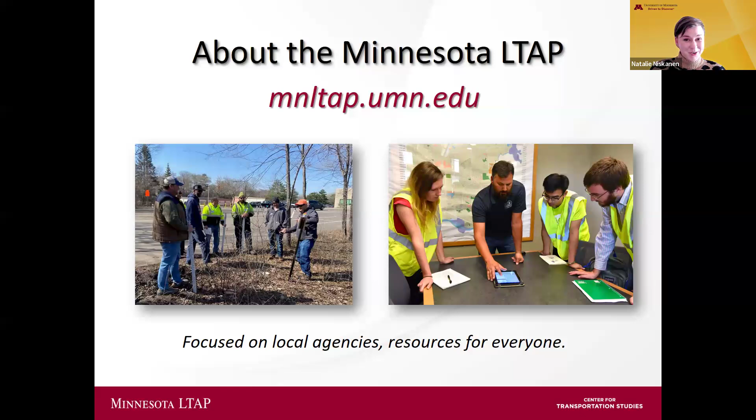I'm just going to provide a quick overview of the LTAP program before introducing today's presenters from the SSSBA. So the Minnesota LTAP is housed in the Center for Transportation Studies at the University of Minnesota. It's one of 58 centers nationwide, and our program is designed to provide local transportation agencies with the tools to improve operations through training, events, demonstrations, technical assistance, and technology transfer. And while we focus efforts on supporting local agencies, everyone is welcome to utilize our resources, whether you work for a consultant or contractor or work for a local agency in a different state or even a different country.

Minnesota LTAP provides multiple training opportunities throughout the year at convenient locations around the state, and we also invite locals from neighboring states to participate if it's convenient and relevant to them. And we also offer self-paced and instructor-led online courses, and everyone is welcome to check out our online training calendar to see what's new and upcoming.

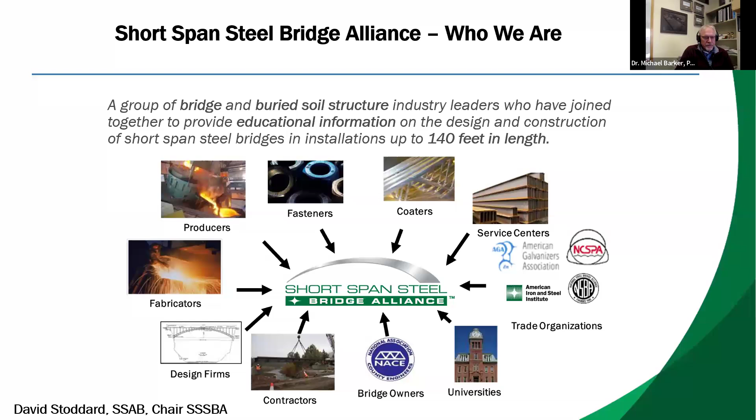Why we are. We started in 2007 with a couple major objectives. One was to remove design obstacles for short span steel bridges, and we're going to talk about those today. Overcome the preconception that concrete is always less expensive in the short span. We're going to talk about that today. Prefabricated steel bridge systems and accelerated bridge construction. We're going to look at some case studies. And then our innovative steel bridge systems that have been developed through the SSSBA or other mechanisms, and we will talk about that today. And of course, today is an example of it, but we are out there to educate owners and engineers and students in steel bridge design.

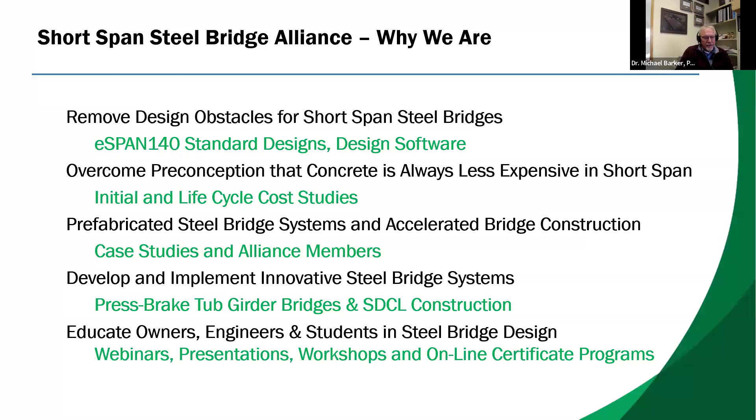So as the director of education, I kind of categorize my education programming as the 5 C's: cost, convenience, construction, county built, and carbon. Now, the ones that are circled here in red, we're going to talk about with some examples and that kind of thing.

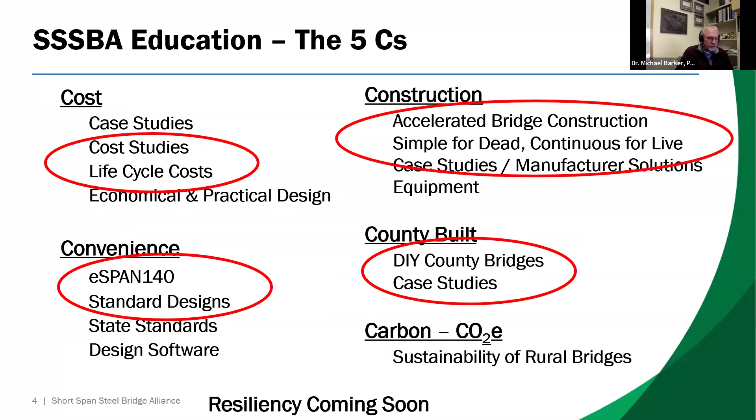And coming soon is resiliency, but I don't have that in the 5 Cs because I can't figure out yet how to do an R with 5 Cs, but that's coming soon. So what we're going to talk about today is initial costs of steel and concrete bridges, or dealing with that preconception, life cycle costs, because responsible owners should consider life cycle costs and long-term performance,

a design tool, eSPAN140, which will give you a steel bridge design in a matter of just a couple minutes. And then, of course, Bridge Manufacturer Solutions, where our Alliance members will design a bridge, sign a bridge, build it, and deliver it to you. Then we've done quite a bit of work with local crews building county bridges, so we're going to talk about that a little bit. And then an innovative system, simple for dead, continuous for live, steel bridge construction, which is an innovative design.

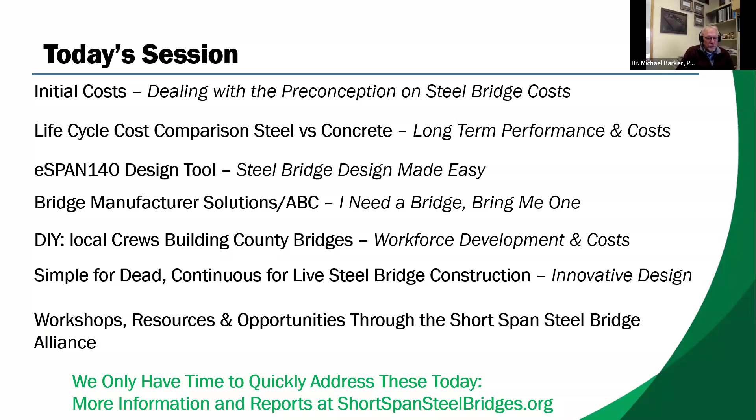Then we're going to end up talking about how you can find out more information, or what our resources are, or additional training. And we only have time to quickly address all these topics today. So Natalie is going to send out that survey to let us know what you're more interested in and how we can get you some more information. But a good place to visit for all of the information is always shortspansteelbridges.org, our website.

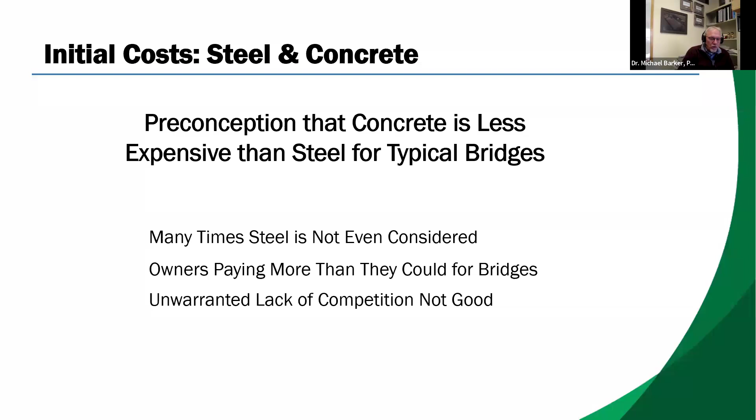So let's start. Initial cost, steel versus concrete. When we started this back in the late 2000s, there was across the country a preconception that concrete is less expensive than steel for typical simple span bridges. To the point where in many states or many counties, many times steel was not even considered. They just went directly to a concrete bridge. And what the National Steel Bridge Alliance found is that the owners are paying more for those concrete bridges when there's no competition than if there is competition. And that unwarranted lack of competition is not good for anybody, the public or the owner.

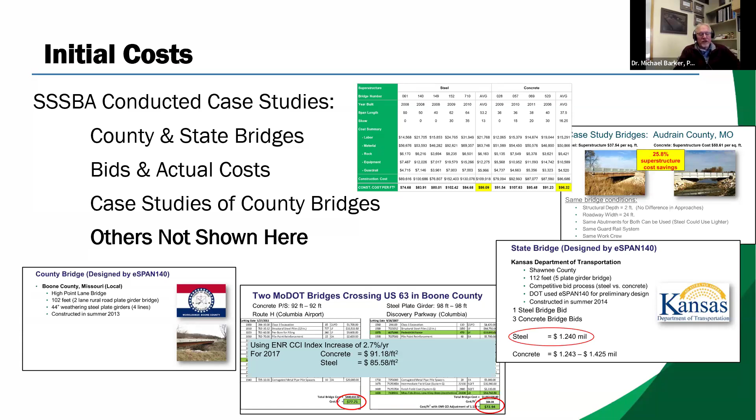And so the Alliance has done I can't tell you how many studies on first costs, and I'm not going to go through them individually just because of time, but I will show you where we're going to be giving this presentation in February a little bit later in today's talk. We've conducted case studies where we look at county bridges and state bridges, and we look at actual costs and bids and that type of thing. And this is just a smattering of some of the case studies we've done to show that, yes,

that preconception that concrete is always less expensive than steel bridges is a misconception, that steel and concrete bridges are competitive. So I'm not sitting here saying steel is going to beat concrete. What I'm saying is, we should consider both steel and concrete so that we get the best product for the best price. And you can look at all these studies on that website, shortspansteelbridges.org.

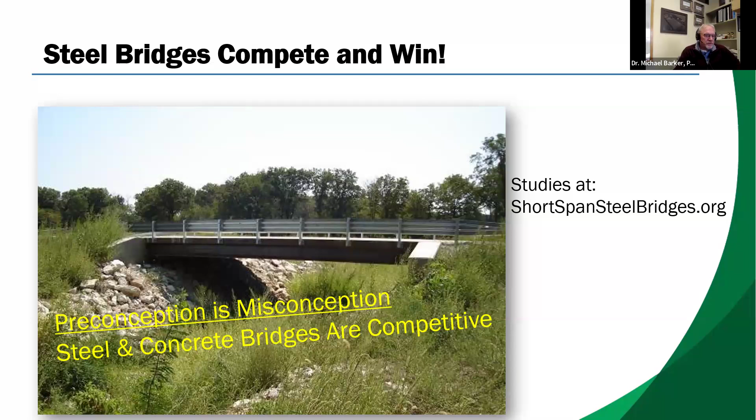But what about life cycle costs? Like I said earlier, responsible owners are starting to look at life cycle costs and life cycle performance of bridges. And as owners replace those bridges, the question of service life and life cycle costs comes up. It's one of the most common questions I get when I go out and talk to counties and states. And the bridge industry, it says, does not have a good answer. And I crossed that out and said, did not have a good answer.

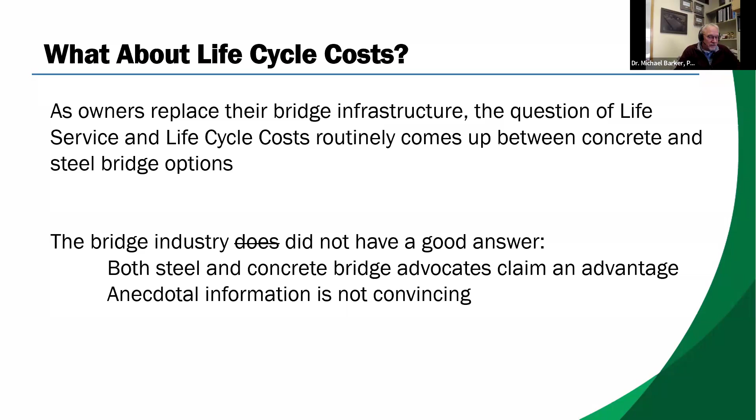In fact, the concrete people always said, oh, no, concrete bridges have better life cycle costs. And the steel bridge people always said steel bridges have better life cycle costs. And they would give their information, and that anecdotal information was not very convincing. And so the Alliance did a study back in 2015, I believe, where we looked at the historical service life, or the performance and maintenance, and the life cycle costs, or the true agency costs, of steel and concrete bridges in Pennsylvania.

And we looked at a very large database, like 1,700 bridges. And it looked at the historical service life because that's what actually happened. The initial year for the study was 1960, when precast concrete became very popular and quality steel detailing became popular. So it looked at more or less modern bridges.

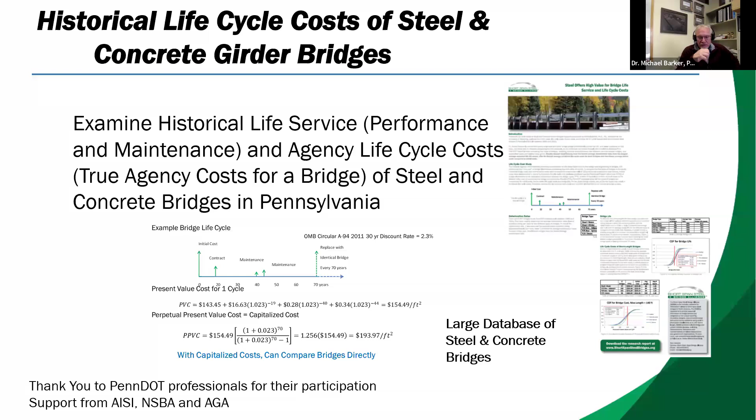And the conclusions from all this. Now, this is a big study, and again, I'll show you where we're going to be giving this here in February. Typical concrete and steel bridges, we're talking about the boxes and the I-girders and the rolled beams and the plate girder type bridges, are competitive on initial costs, which we already knew, future costs and life cycle costs, and even bridge life.

And the conclusion of this study is that owners should consider both steel and concrete bridge alternatives for individual bridge projects. When we looked at all of that data, all the types of bridges are similar with none way out of balance, meaning none have high life cycle costs compared to the others or low. And you can find this report on the shortspansteelbridges.org website.

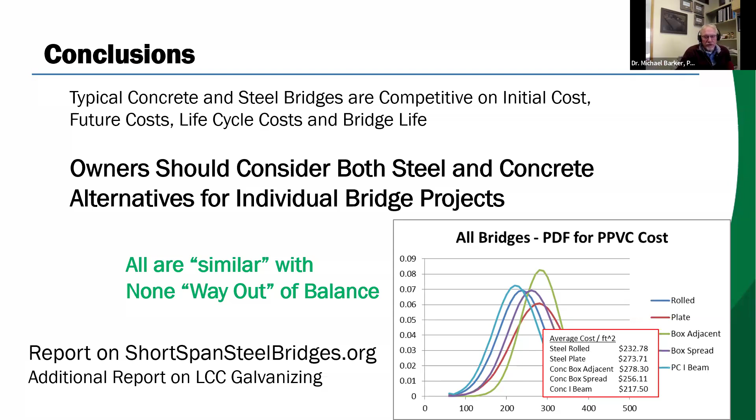And then we also did a study on galvanizing. Galvanizing is a long-term steel protection system. And so the industry was interested in what kind of effects galvanizing has on life cycle costs. You can find that report there also. Okay, so we've taken care of costs.

So the Alliance deals with these types of bridges, where yes, corrugated steel pipe, or what we call culverts, is a buried steel bridge, and that's certainly one that our group associates with. And then you've got corrugated steel plate, which is kind of an arch bridge, with corrugated arches going across there to create the bridge. And then, of course, the rolled beam shaped bridges and the plate girder bridges.

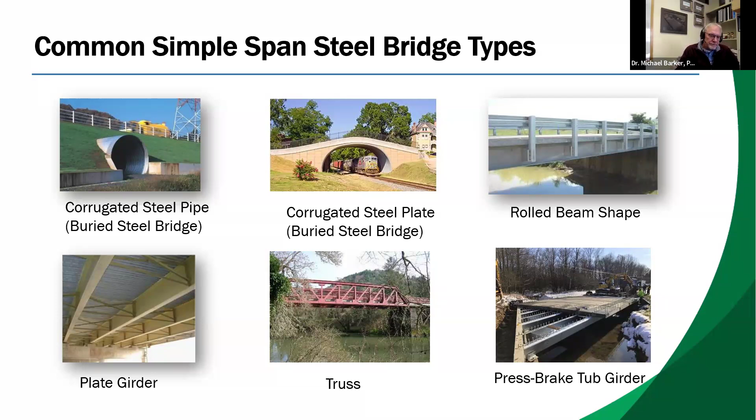And then our manufacturers certainly have their truss bridges. And then as part of the Alliance and industry, we developed the press brake tub girder. And we're going to look at an example of that because that's one you might not have heard of before. But if we think about the bread and butter bridges, the traditional fabricated steel bridge where a county or a state wants to put in this 80-foot bridge.

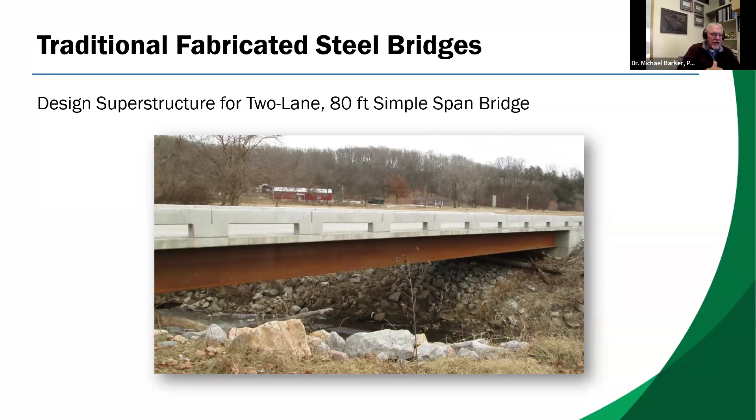Well, in the beginning, that owner or the engineer has to make some decisions on the service performance of that bridge. For the hydraulic opening and all that, we need this 80-foot simple span composite bridge where we're going to build it out of steel girders. We're going to have two 12-foot travel lanes with an average daily traffic, a certain width, and we're going to use Jersey barriers because we want to protect the water underneath maybe. Okay, that's the service part of the bridge. That's what you see when you're driving over it.

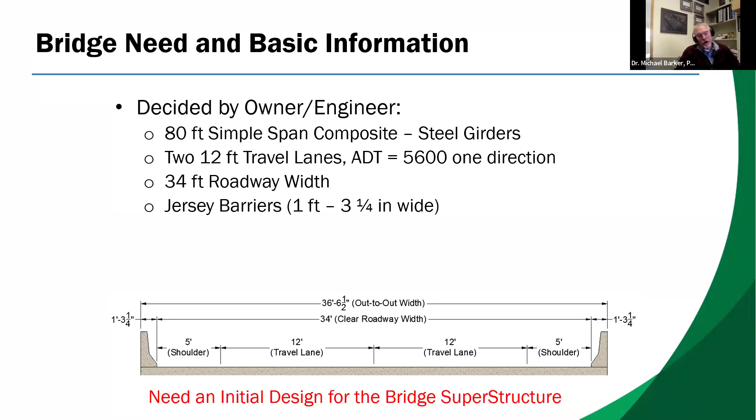Now, we need an initial design for the bridge superstructure. What kind of girders are we going to put underneath that meets all of the AASHTO requirements and is economical and performs well? Well, the Alliance developed eSpan140, which is a free design tool that you can find on shortspansteelbridges.org, where it has created a very large database of different designs that meet all the AASHTO criteria for span lengths from 20 to 140 foot, for different girder spacings.

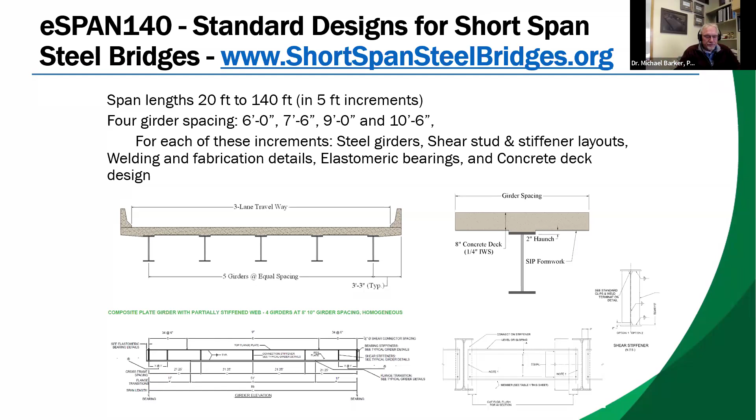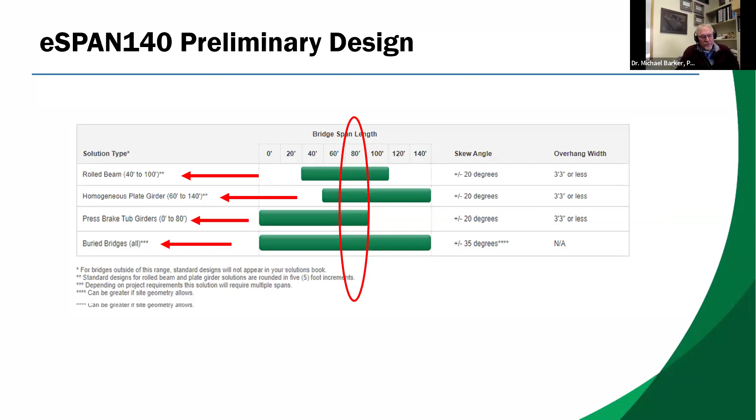And for each one of those, eSpan will give you the steel girder design, the shear stud design, stiffener layouts, welding, fabrication details, even the bearings and the concrete deck design. And so if we need to design this 80-foot span bridge, we go into eSpan, and it's going to give us 4 or 5 solutions. Yes, it's going to give us a rolled beam solution and a plate girder solution, but also some of our manufacturers' solutions like the press brake tub girder or buried bridges that we'll look at a little bit later. But for an 80-foot span, it's going to give us a rolled beam and a plate girder. It's really simple to run.

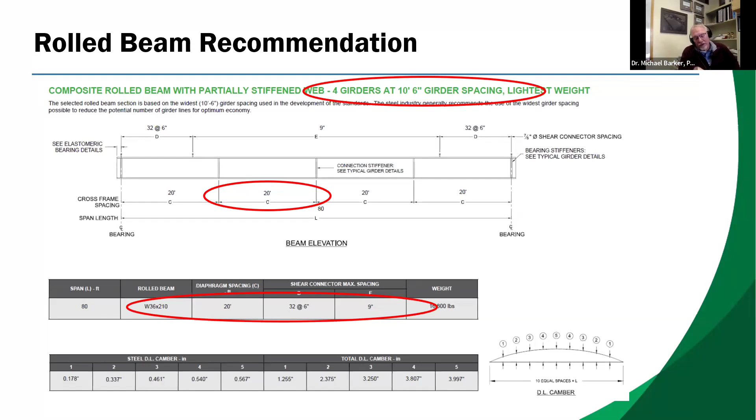You put in how long the bridge is, how many lanes you have, what your roadway width is and what your barriers are. And it's going to give you some designs that meet all the AASHTO requirements. This is an example of the lightest weight rolled shape design. It also does limited depth rolled shapes. And it says, let's put those girders at 10 foot 6 inches, let's make those W36 by 210s, and let's have some diaphragms every 20 feet. Boom, in a matter of minutes, you know what it's going to take. For the plate girder, we can optimize a little bit better. We can get rid of some of the weight by transitioning the flanges and making the web thinner.

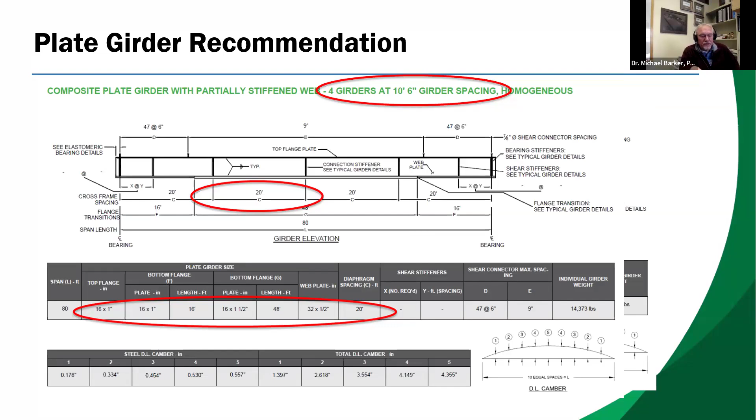Here's a plate girder, a homogeneous plate girder made out of 50 KSI where it says, yeah, we're going to have a top plate and a bottom plate. We're going to transition that bottom plate. We're going to have a web, and we're going to have those diaphragm spacings at 20 feet. And now, in just a matter of minutes, we have a design that we can put on the table and compare to those concrete options and then let the market decide.

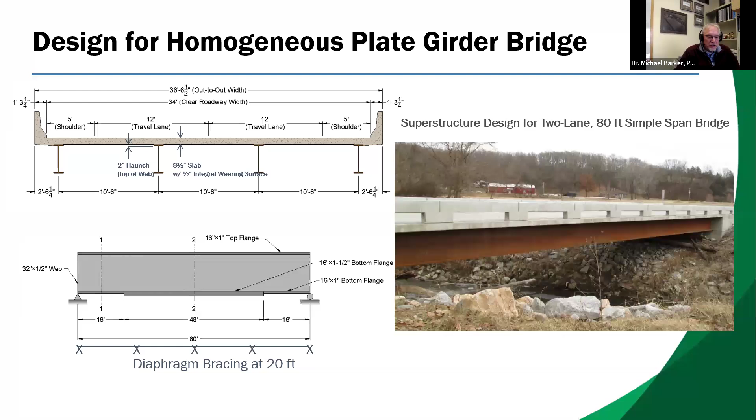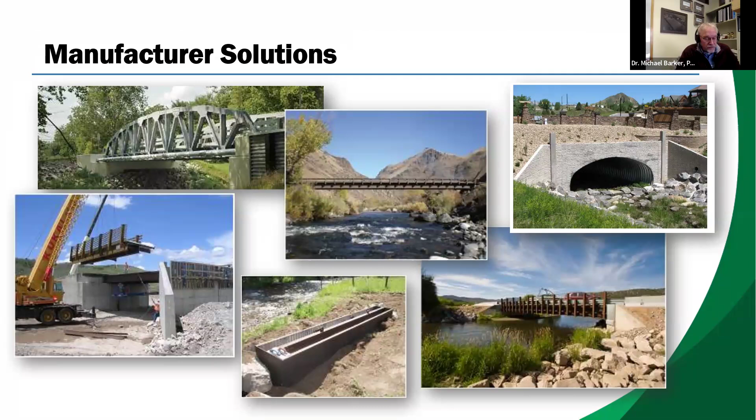Now we have a superstructure designed for that 2-lane, 80-foot simple span bridge in just a matter of a couple minutes. Now, I did say that eSpan will also talk about manufacturer solutions. We have prefabricated bridge manufacturers that are part of the alliance that do truss bridges and modular bridges and ABC abutments and the whole range of things, whether they're buried or rolled or plate or truss.

We're going to look at three of those, three different types of bridges. So these are prefabricated, which kind of means they can be accelerated bridge construction bridges. And we're just going to look at a showcase of three different types of steel bridges. The first one is a buried steel bridge, one of those arch bridges from Big R. A modular beam bridge, the most common type of prefabricated bridge, from Contech. And then one of those press brake tub girder bridges that you might not have seen before from Valmont.

And these prefabricated bridge manufacturing firms and traditional fabricators fabricate and deliver many styles of steel bridges. And these case studies are just a sample of the varieties that they produce. And of course, you can get more information just from an internet search, but also from our website, shortspansteelbridges.org.

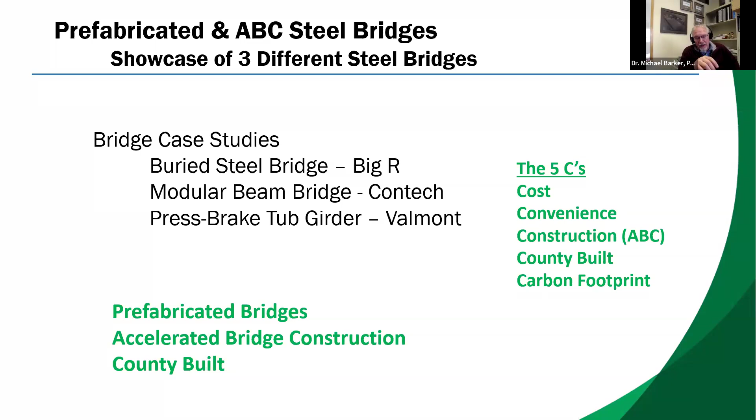So for this first case study, this corrugated steel plate buried steel bridge was built in St. Johnsbury, Vermont. The bridge was fabricated and designed by Big R Bridge in Greeley, Colorado, and built by J.P. Sicard. The bridge is located on a steep, narrow site on a curve with residents living right nearby. And there's poor soils on the site, so the designer needed a system that could accommodate significant differential settlement.

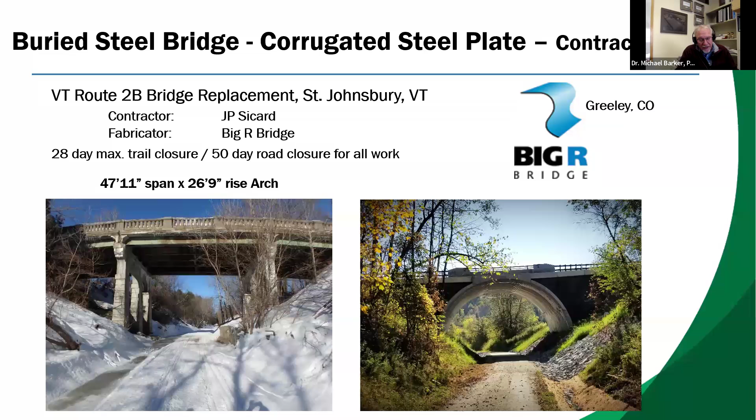Now, limiting the days the trail could be closed, so this is a rails to trails type project, and constructing the bridge before the peak summer and fall seasons was a priority of the owner, and the contractor had a maximum 50-day closure of the roadway. But they actually earned a monetary incentive when it was reopened after only 45 days. And so this ABC project used precast concrete foundation blocks and precast wall panels to significantly shorten the construction time with no concrete curing times.

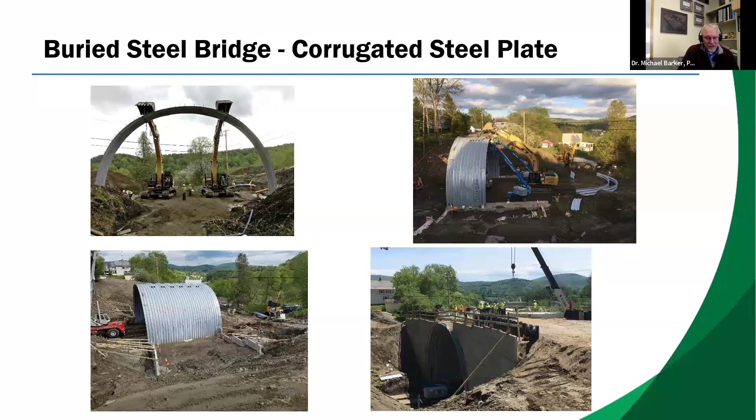And so the corrugated structural plate is stacked and shipped to the site and bolted together to make the arches. And then light equipment can be used to lift the arches and connect them together across a width for stabilization. And then the bridge arch is covered with soil and the roadway built. A buried steel bridge is lighter weight, flexible, and able to handle anticipated settlement. With the lightweight structure, the Vermont bridge was able to use those precast footings.

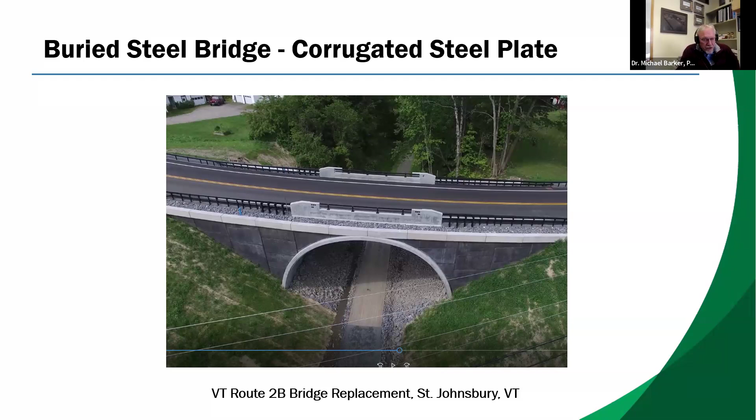Because of the arch, shorter spans are required to achieve vertical clearance requirements, and there is a continuous road surface with no bridge deck or joints to maintain. So that was our first example, a buried steel arch bridge. They also come in lots of different forms. For instance, that was kind of a significantly large bridge.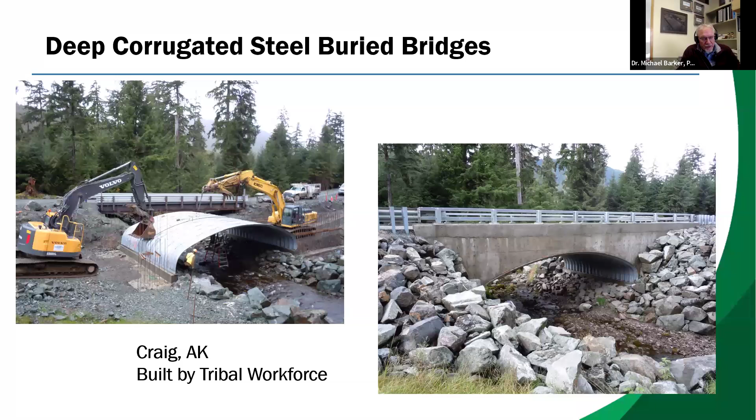So the prefabricated modular beam is probably the most common prefabricated bridge out there. This one is a county crew built bridge. It was built in Whitman County, Washington, and it was a replacement project built by county forces for an originally built 1952 wood structure. The replacement bridge was planned to have a longer span in order to improve the hydraulic opening under the bridge, which is very common. And this also made it easier to build the new foundations behind the existing wood foundations.

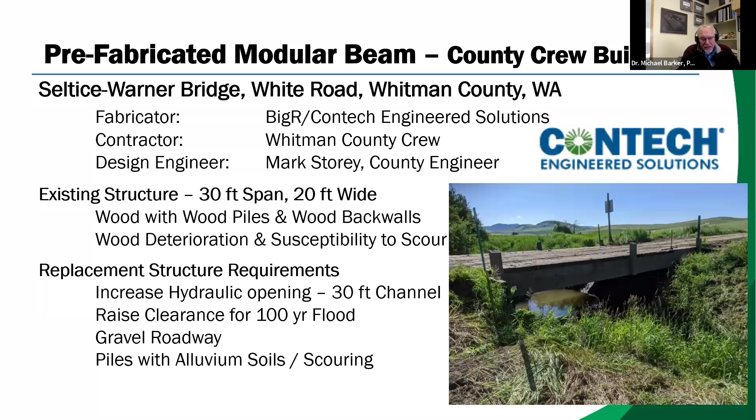And one of the goals of the replacement bridge, of course, was to open the channel wider and raise the bottom chord of the bridge above the 100-year recurrence flood. And then this is again a gravel surface bridge. Now the successful bidder with the lowest cost was a modular rolled beam steel structure supplied by Contech.

So the final dimensions for the new superstructure were 35 feet long and 28 feet wide. The modular rolled beam steel bridge consisted of 3 modules that were shipped out to the site on 1 truck. And each module had 2 weathering steel rolled beam girders fully assembled with a corrugated steel deck for the gravel riding surface.

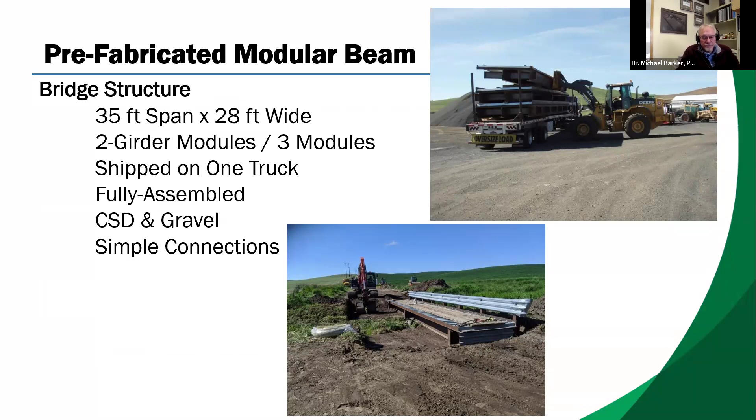Now, these are just a few of the pictures of the 2-girder superstructure modules being erected. The modules are shipped to the site, assembled with corrugated steel decks, side dams, simple cross-frame diaphragms, and guardrail stubs. Front end loaders and excavators pick up the modules and place them on the abutments with the bearing assemblies. The modules are connected together using simple connection details. The guardrail stubs, guardrails, and back wall are installed, and the gravel roadway surface installed.

And so here's where selecting a bridge structure that can easily be handled by 1 or 2 excavators significantly reduces the overall project costs and shortens the construction time. Modular steel bridges in particular fit this product category as they are relatively lightweight, are easy to handle, and match and fit well due to the quality of shop fabrication. And with no concrete curing time, the bridge is ready for traffic.

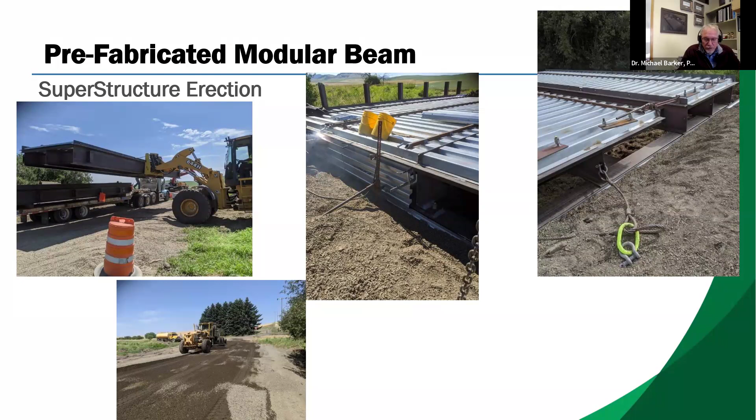Now, this Seltice-Warner Bridge project was started on June 15th and completed and opened to traffic on July 15th in 2020. Whitman County sought competitive quotes for the manufacture and delivery of both steel and concrete superstructures for this site. The cost for the concrete alternative was $82,000 and the cost for the modular beam was $59,000. And so I just put this in here to show one example where, yes, steel is competitive and steel should be considered. And then, of course, with the cost of labor and equipment, the pile foundation and permitting, the total bridge cost was $159,000 or $162 per square foot.

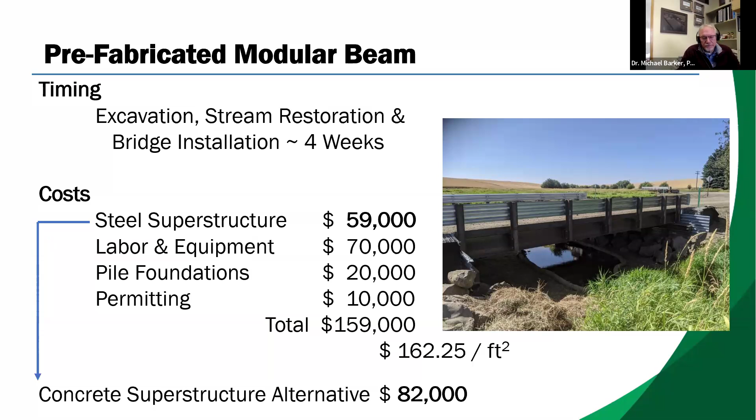County crew built bridge. Now you have a company right there in Minneapolis, Minnesota. Now we thank everybody for joining us. And we started with Minnesota LTAP, but because of the word of mouth and the marketing, wow, we have people from all across the country.

But I do want to mention that in Minnesota, you have one of these prefabricated bridge manufacturers right there in Minneapolis, Wheeler. And here's just a couple examples of bridges that they have produced in the past. Out in Utah, they had to replace a bridge that serviced a lot of agricultural area, and they came in with a modular beam bridge with a concrete deck.

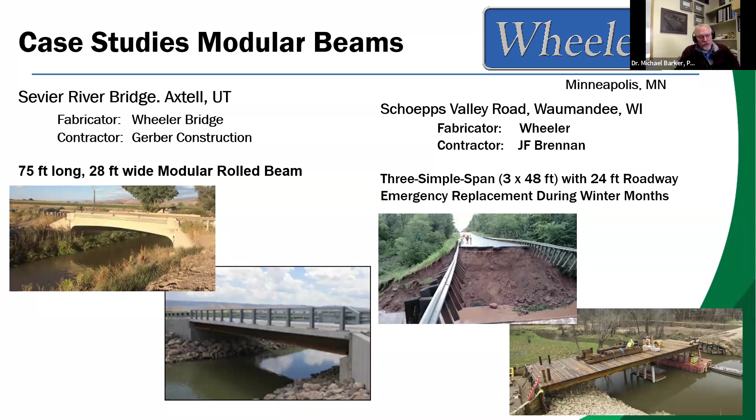And then the one on the right, in Wisconsin, there was a storm that took out a bridge, and we're talking about in the winter months. And they needed that bridge because it cut off part of a community. And Wheeler was able to come in there with a no-concrete steel and wood bridge and replace it during the winter months with accelerated bridge construction. And of course, you can contact Wheeler or any of these other manufacturers through the website or through your own internet searches.

So we've got one more we want to talk about here. This is a press brake formed steel tub girder. So FHWA came to the Alliance back in about 2012 and said, hey, what is the next modular accelerated construction steel bridge product that we should be pursuing? And we got a lot of people together in Chicago, went to a Cubs game and also met, and came up with a press brake formed steel tub girder, where you take a standard width plate, put it in a brake and bend it into a tub, put some shear studs on it, put some concrete on it. So you have these modules, and then you go out and you just put them in place.

So that reduced fabrication costs, because yes, tub girders have been around a long time, but you take a flange and a web and you weld them together. There's no welding here, which removes fatigue issues, which reduces costs, and they can be mass produced. And it reduces stiffeners and cross frames. And these can be accelerated bridges. In fact, with a precast deck, you can install these bridges in 1 or 2 days. They are modular, they're simple to fabricate and install. Now, our research on that started in about 2012, but there's a guy in Michigan that actually put one of these in place in 2004.

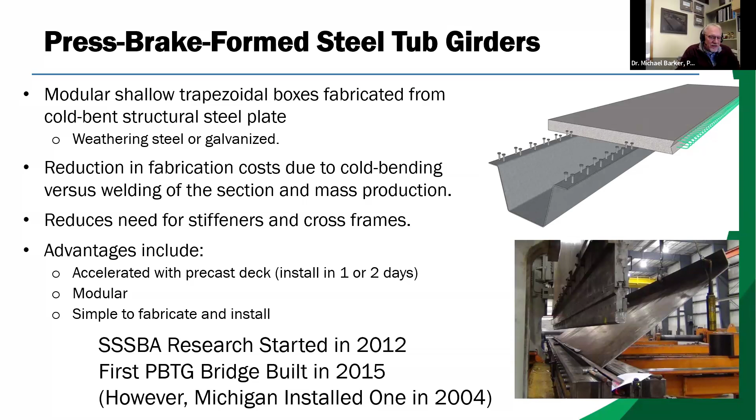Now, that same guy who built that 2004, he went to a company called Valmont and said, hey, how about we develop a division here to produce these press brake tub girders? They call them U-beams, but it's still a press brake tub girder. And this is not a proprietary design, but Valmont decided to take this and run with it. And they've done a really good job, as I'll show you on the next slide.

And so the bridge I'm going to show you is here from Barron County, Wisconsin, where there was an existing timber slab structure, 96 foot long. It was old and they needed a new structure. And Barron County went with a two-span, 104-foot length. So, of course, they increased the hydraulic opening a little bit and clearance a little bit. And they used these press brake tub girder bridges.

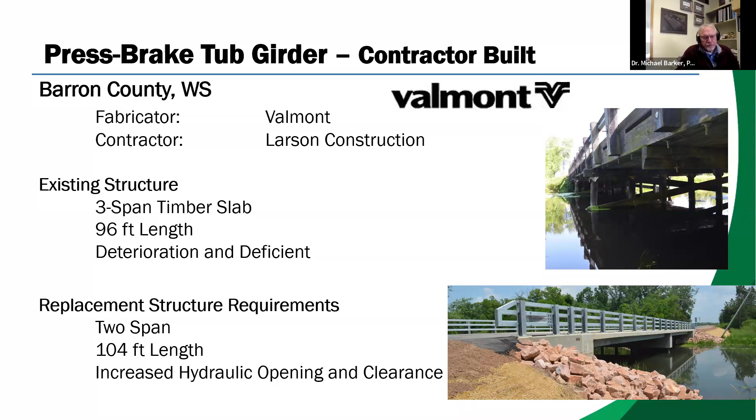And so at Valmont, they developed this whole system where they bring in these standard width plates. They came up with efficient ways of bending them. Then they have a machine they developed for cambering them. Again, another machine to put on those studs. And then, of course, Valmont likes galvanizing, which is really a good steel protection system. And they have all that stuff right there because they're poles.

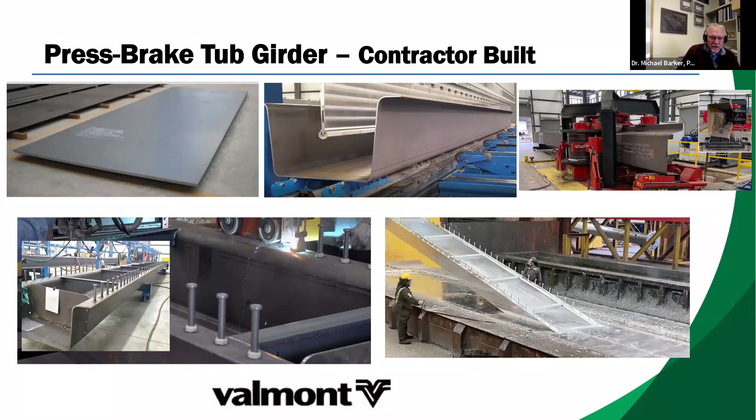They build these tubs. For this bridge, they built the tubs without a concrete deck, shipped them out there, put them in place, put on the concrete or shored up, put in the rebar cages, cast the deck, put on their guardrail, and they have this two-span bridge.

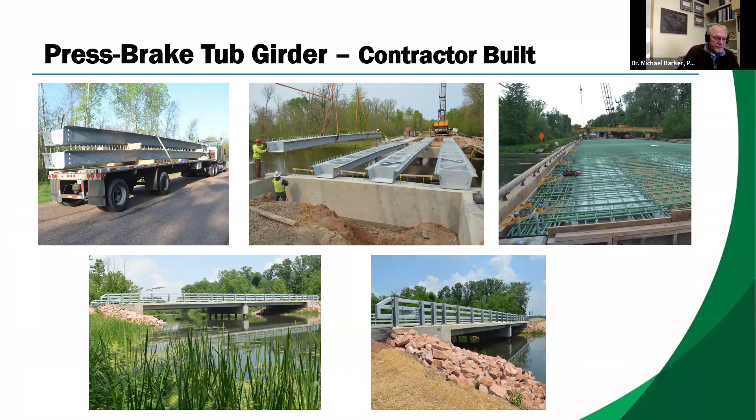Now, you also can precast these things. One is precast the decks right on those tubs, and Valmont will do this for you, or you can do it on your own with your own fabricator, where now you send out pre-decked modules and you put in a longitudinal closure pour with like a UHPC or something like that.

Or the bottom slide here shows where those tubs go out as individual tubs and they have the studs on them, and you put precast deck panels on them with grout holes and all that kind of stuff. And you do the closure pours in the grouted shear pockets. And so if you have questions about these, you can contact the Alliance or you can go to Valmont directly.

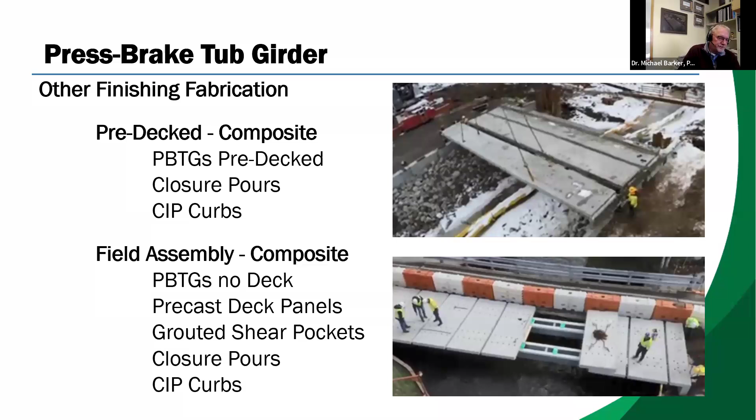Okay, so we looked at a couple bridges that were contractor built, and we looked at one bridge that was county built. And so the Alliance started putting together some educational resources for counties to consider whether they should be building their own bridges. Because there are a lot of bridges in the counties that need replacement. And we need cost-effective and sustainable solutions. And one option is to use county crews for bridge installations.

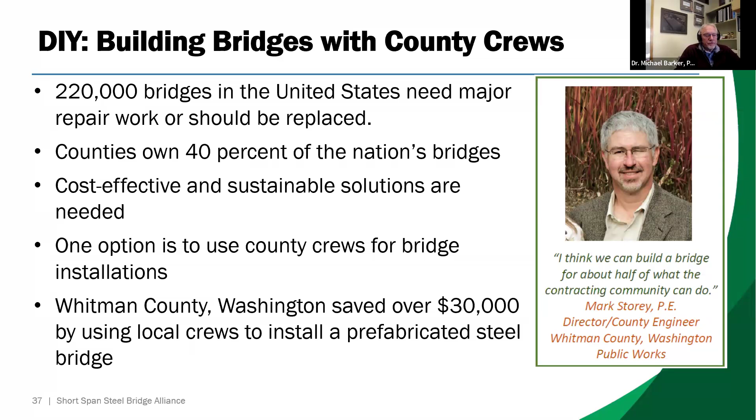For instance, this slide here says Mark Storey up in Whitman County saved over $30,000 by using local crews to install a prefabricated steel bridge. It also develops his workforce. So the Alliance developed a DIY county bridges education packet, where there are over 3,000 county type organizations in this country.

And the purpose of the packet is to have counties consider whether they should be building their own bridges, because counties can save money and of course build more bridges, which is very, very important for those counties. It can use accelerated construction and minimize public inconvenience because they are in control of the work site, and it develops county workforce and uses county equipment.

So we came up with 6 topics. There's kind of 6 lectures in this, which starts off with, can your county build this bridge, and then moves into planning, permits, environmental issues, geotech considerations, and then how to select a bridge type and bid for that and award that. And then foundations and substructure design and installation, because there are some easy ways that the county can do it, or you can subcontract that out and have a contractor build you one.

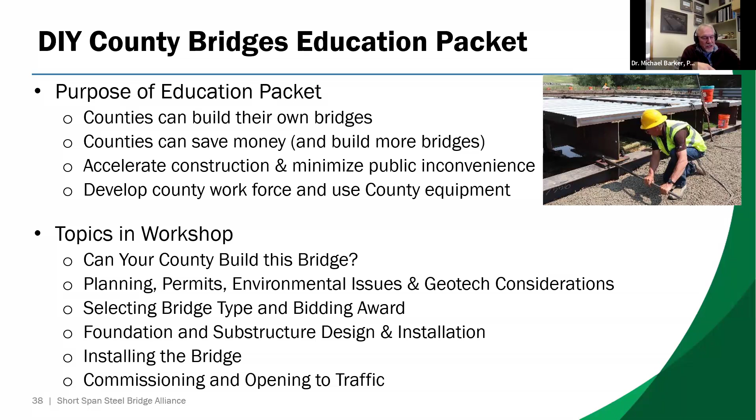And then, of course, installing the bridge. That's actually the easy part, especially if you buy one of these prefabricated bridges, and then commissioning and opening to traffic. And so we use this Belmont Bridge in Whitman County as a learn by example for how a county can build their own bridge.

And it starts off with the existing bridge being a pretty old, deteriorated wood bridge, only 20-foot long, and the new bridge being 30-foot long. So we increase that hydraulic opening, increase the clearance, 28-foot wide. And this is a TrueNorth modular steel bridge, installed by the county crew.

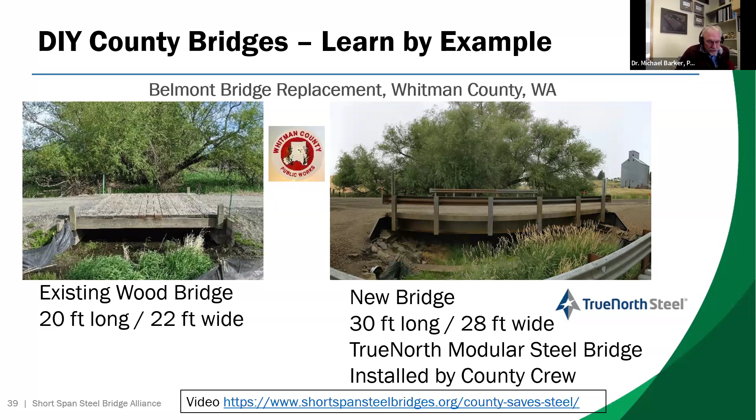Now at the bottom there, and I know that Natalie and Dan Snyder are going to post these on the websites later. Take a look at that video. It's pretty cool. That's just a video that talks to the bridge engineer and the bridge foreman and the workers on how they developed the capacity to be able to do their own bridges. So that's a good video. I'm not going to show it here, but you are certainly welcome to go through with that. And True North is one of our Alliance members.

Now, we gave this talk to NACE, the National Association of County Engineers, in 2022 with just a 1-hour presentation. They weren't sure what they were getting. And I, Michael Barker, and Mark Storey, that engineer from Whitman, went and just gave a 1-hour talk on this. And it was very well received. They were really happy with it. And so they invited us back for a 2-hour session the next year for NACE.

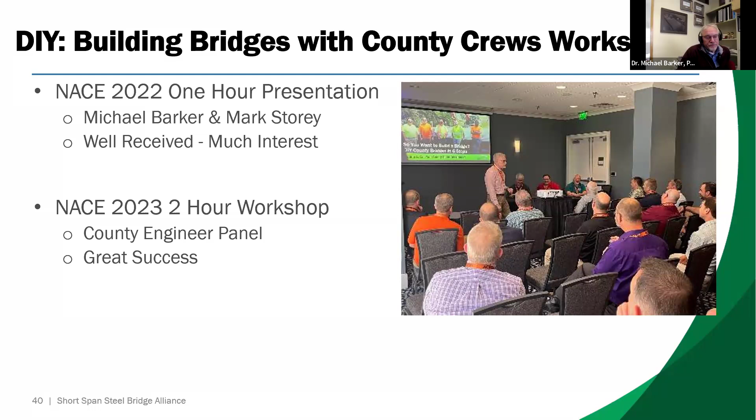So we know there's lots of bridges that need replaced. We know there's ways to do that. We know we have alternatives for materials and construction and all that kind of stuff. And one of the driving factors for getting this done is the new bridge infrastructure law, right? And in that, you can get good federal money for doing bridge projects on a local level or a state level with a state-local partnership. Now, the minimum amounts are pretty big.

And so even in the BIL, they talk about bridge bundling. Hey, let's get several bridge projects together that are coordinated in the design and construction to help economize, save money, and get these bridges built. And a lot of this money under the BIL and of course the BIP, the Bridge Investment Program, are targeted for tribes or local bridges or off-system bridges. And so there's money to go after, and bridge bundling becomes an important part of that.

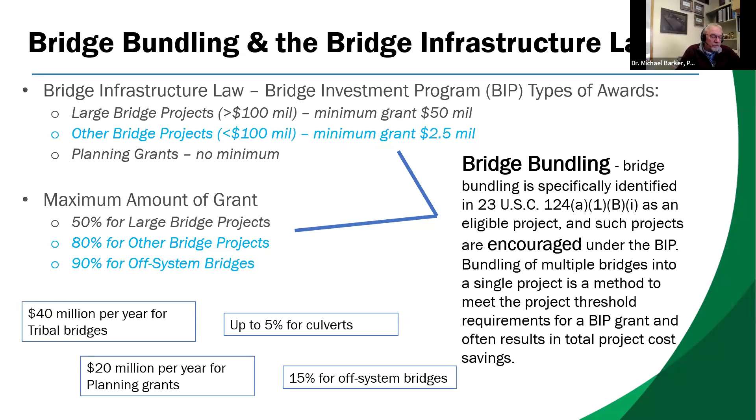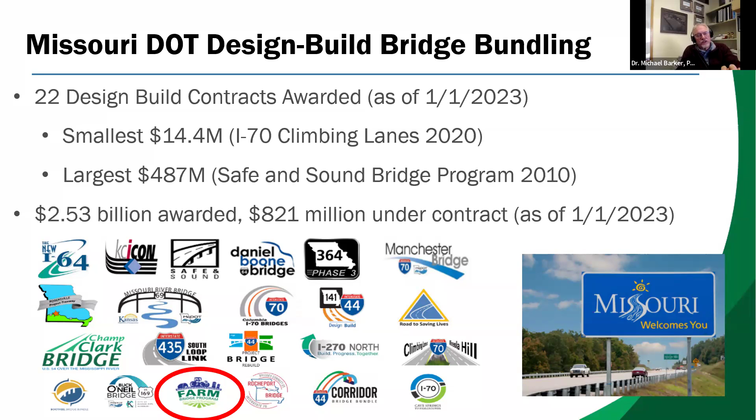Now, Missouri DOT is probably one of the leaders, if not the leader in the country, for design-build bridge bundling. They've had lots of contracts, they've done lots of projects. And one of those projects down here at the bottom, a little bit left, circled in red, is called the FARM Project. And I'm just going to talk about that a little bit because I think it's important to see how this state does their bridge bundling design-build projects. So FARM stands for Fixing Access to Rural Missouri. And what happened was MoDOT identified up to 40 bridges in northern Missouri for replacement.

But they're a little unique in the way they do it. They don't say, hey, how much will it cost us to do these bridges? They say, we have acquired this much money, or we're willing to put this much money. Tell us what you're going to do with that money. And then they're looking for the best value for that fixed budget.

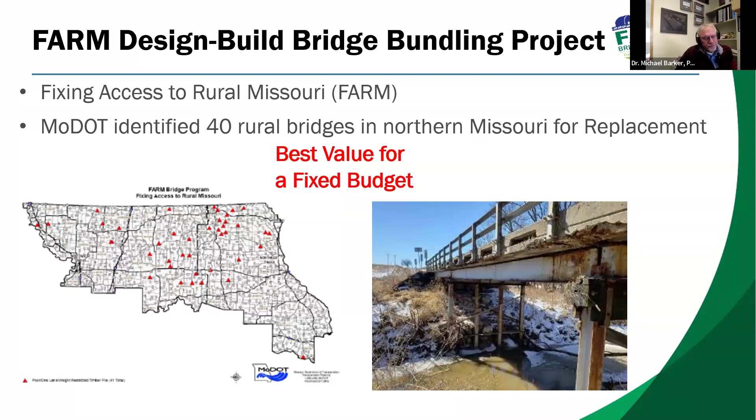And then they have a scoring system where it's not just the maximum number of structures or the maximum square footage or that type of thing. It looks at, yes, the number of structures and the size of those structures and the ADT and that kind of thing. But that's only part of it. That's 55 of 100 points. Then they look at bridge quality and longevity. So they're bringing in those other aspects, not just maximum square footage. And that's worth 30 points. And then completion and maintenance of traffic, or kind of accelerated bridge construction and control of the construction site and that kind of stuff. And they rate those.

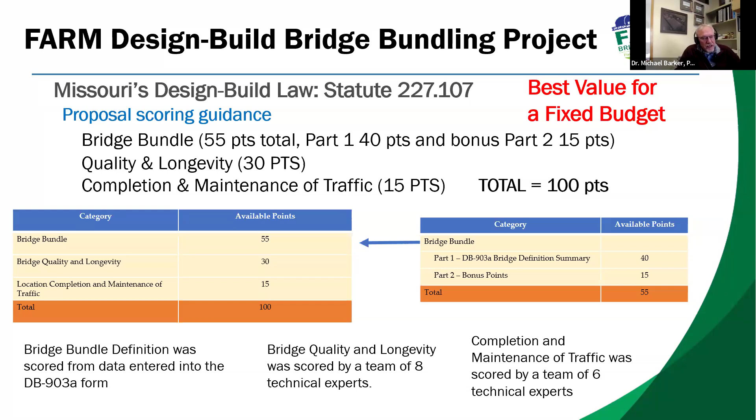And so, of course, the number of bridges and that kind of stuff, where there's a base and a bonus part of that, is 55 points. And then the bridge quality and longevity, they scored by a team of 8 technical experts. And then for the construction part, the completion and maintenance of traffic was scored by a team of 6 technical experts. And again, they're looking for a best value for a fixed budget.

So 3 teams had qualified proposals, team 1, team 2, team 3. The first 2 were primarily concrete. The third one was primarily steel. And what we see here is that the primarily steel bridges won the bid. And of course, that's why that's part of my talk today, because if it was the concrete bridges that won, we wouldn't be talking about this today. But the steel bridges won, and we want to look at why.

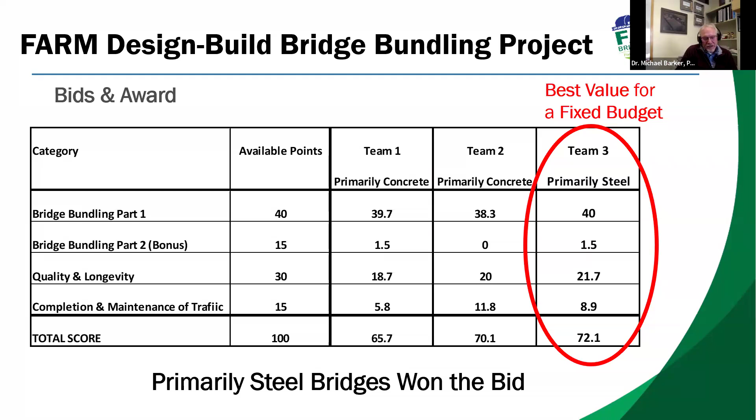So how did the steel win the bid? Now, there's lots of reasons, but there's really an important one here. There's 25 multi-span bridges in the winning package, and for the bridge bundling, the steel bridge proposer won with 40 points plus 1.5 bonus for the highest score.

There were 31 bridges replaced, but they used an innovative simple for dead, continuous for live load design. And when we talk to the owner, the contractor, the designer, and the fabricator, they believe this innovative system is the reason they won this contract.

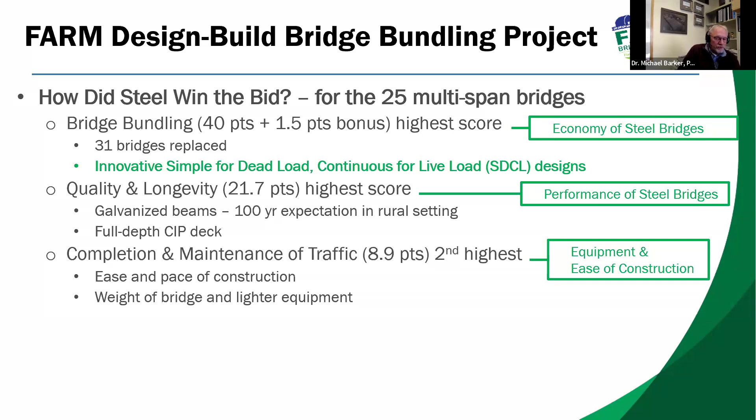For quality and longevity, they also had the highest score because they have galvanized beams, and that impressed MoDOT because of the 100-year expectation, at least in these rural settings. And they used a full depth cast-in-place deck versus the partial deck thickness decks. For completion and maintenance, because of ease and pace of construction and the weight of bridge and lighter equipment used, they had the second highest score.

So let's just look at the Simple for Dead Continuous for Live, or SDCL. Multi-span bridges using simple span wide flange beams with simple details are laid out on their supports, and then when the deck is cast, it is made continuous. You form up the pier region to make that continuous connection of the simple span steel beams. You have a compression block at the bottom, and you use the deck for the tension side.

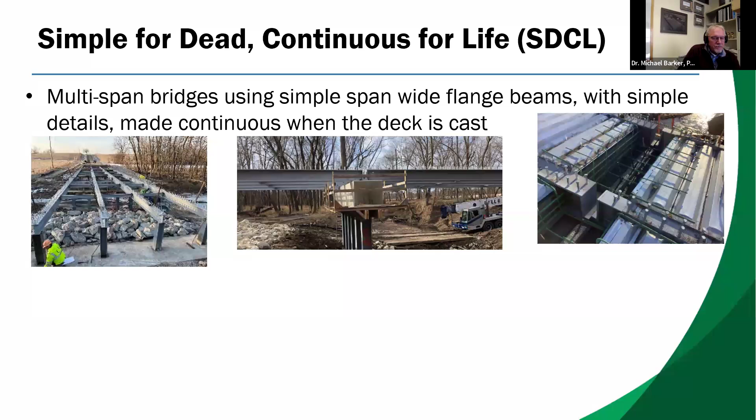Then, just like any other bridge, you put on your rebar cages, you cast your concrete, and you put on your guardrails or your rails, and you got yourself a bridge.

So what are the advantages of Simple for Dead Continuous for Live? Well, certainly ease of construction. Slinging around a bunch of simple span steel girders is a lot easier than long continuous spans, because those are going to have field splices that you have to put together, and field splices can be expensive. And because it's a set of simple spans, you can have flexible and economical span ratios, and you can customize the beams to the spans.

But here's another big one. Because of the simple details, it makes fabrication more competitive, because the fabrication shop only needs to be simple bridge certified instead of intermediate or advanced bridge. If it had splices and other more complicated details, they would have to be certified at a higher level than for these simple bridges.

And then you look at some other benefits, the beam weights. A typical steel beam was a W18 by 158. That's only 9,500 pounds, whereas the concrete precast beam type 3 is 24,000 pounds. Much less weight, lighter equipment needed. And of course depth is always important because of abutment work and approach work. So you have shallower depth: an 18-inch depth, or almost 20 with the W18, whereas a concrete bridge is almost 40.

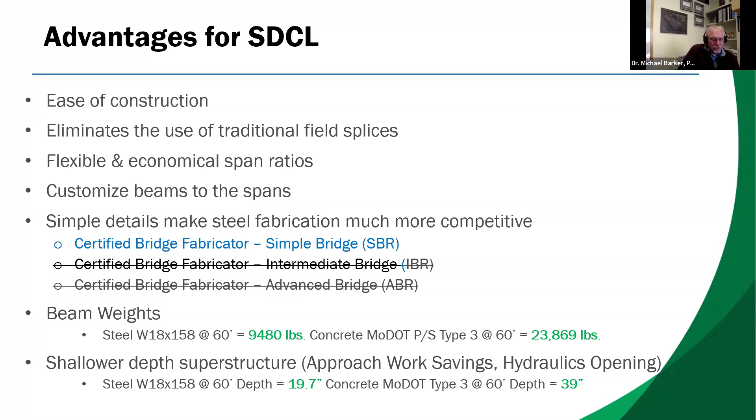So those were the three different types of bridges we looked at, and how we can look at bundling bridges and going for some of these federal funds. And so in summary, today's steel bridges are state of the art, and they have innovative designs, as we've seen today. They are durable. There are thousands of bridges that are over 100 years old. Speed of construction: they're light, small equipment.

We can use accelerated bridge construction, especially those prefabricated bridges, because they've already worked out all the design details and fit details. They make hundreds of these bridges, so it's going to go together well. Cost effectiveness, they are competitive. Sustainability, we've done some sustainability studies where we show that steel is very competitive with concrete, and resiliency.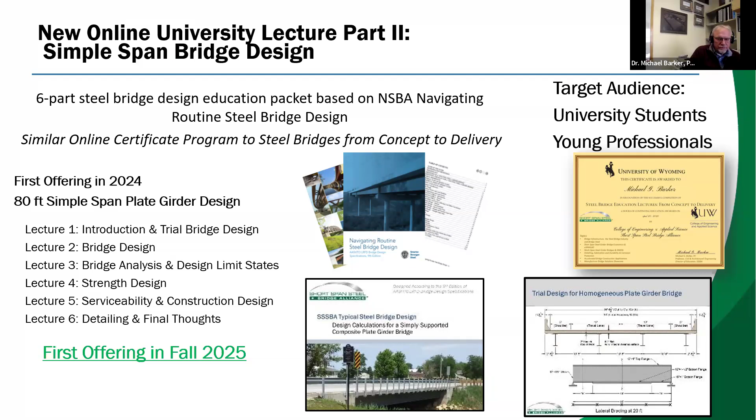And again, it's going to be based on National Steel Bridge Alliance's recently released Navigating Routine Steel Bridge Design. Because if you know the AASHTO specifications, they are quite complicated, and for a simple span bridge, it should be simple. And our target audience for this are university students and young professionals. So you can look for that in the fall.

We do workshops. We've done workshops all over the country for counties, for state DOTs. I put a few of the recent ones down there on the bottom left, where if you're interested, your state or your county association, or even if you're a large design firm, in having the Alliance come in and do a workshop that's tailored to what you need. You know, we do show some standard 4-hour or 6-hour workshops. And part of that survey that Natalie's going to have you fill out at the end may lead to one of these workshops in some part of the country that you can attend.

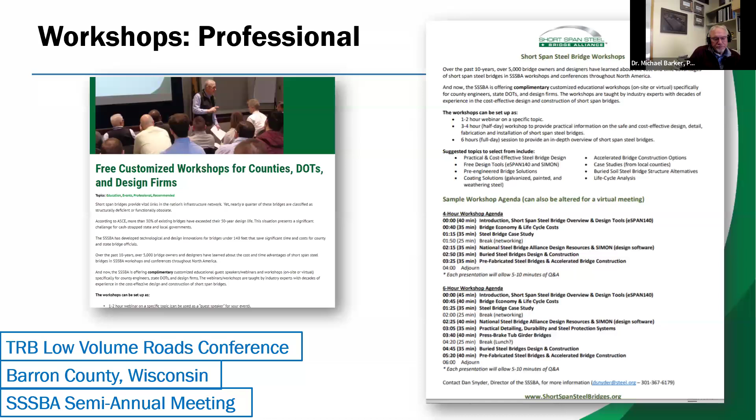And then we're starting something new this year. We are coordinating with the American Galvanizers Association for a quarterly Building Better Bridges webinar series. This is brand new. We just settled on everything about a week ago, and the first one is February 19th. The registration for that one's already open, and that one's going to be on steel versus concrete life cycle performance and costs. And that's where we're going to get into that very short 3 slides I showed you earlier, and show you what we really did and why it's validated, and why we really do need to consider both steel and concrete.

And then in April, September, and December, that's kind of the quarterly idea. We're going to be looking at some other things. For instance, in April, those buried steel structures. In September, we're going to look at that eSPAN140 and some newer design tools where you can design a steel bridge in just a matter of a minute or 2. And then on December 10th, we're gonna do a more full presentation on Simple for Dead, Continuous for Live designs for optimal performance. And these are free. You sign up, you get PDHs. Go to the websites, either the AGA website or ours, and you can find those.

And then, of course, that DIY county bridges in 6 steps. If you've got a county where you want to consider, hey, should we build up our workforce, use our own equipment, maybe buy one of these prefab bridges, maybe piece together one from a traditional fabricator. Let's build our own bridges.